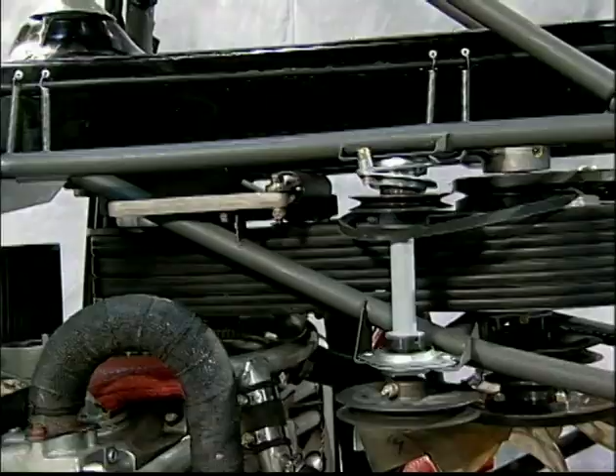You may find it necessary to reposition or remove the fan countershaft assembly to help in removing the pulley assembly. Loosen the main drive belts. Remove the bolt that secures the clutch tube weldment to the clutch arm casting.

Remove the two 5/16" bolts that secure the rod ends to the idler pulley arm. Caution: during the construction of the helicopter and final installation of these bolts, the builder was instructed to use Loctite thread locker on the bolts. It is likely the rod ends have also become locked to the bolt grip area.

When backing the bolts out, be sure the rod ends are not pulling away from the pulley assembly with the bolt. If the rod ends pull away from the pulley as you are backing out the bolts, damage from stress bending of the weldment will occur. Remove the clutch tube weldment.

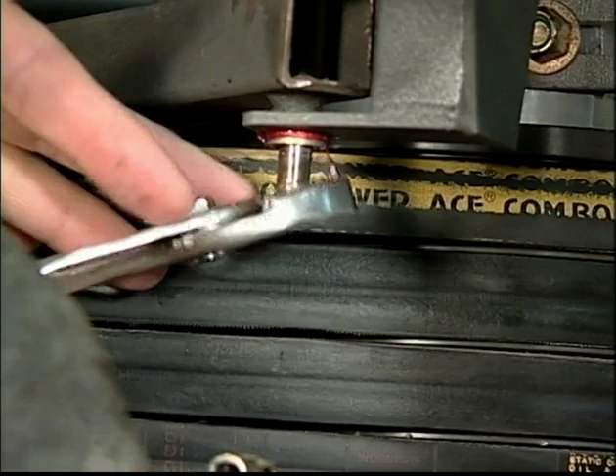Remove the pulley mounting arm bolt, part number E00-2522. Remove the assembly from the helicopter. Check the end play of the rod ends of the clutch tube weldment and the bolts in the idler pulley assembly.

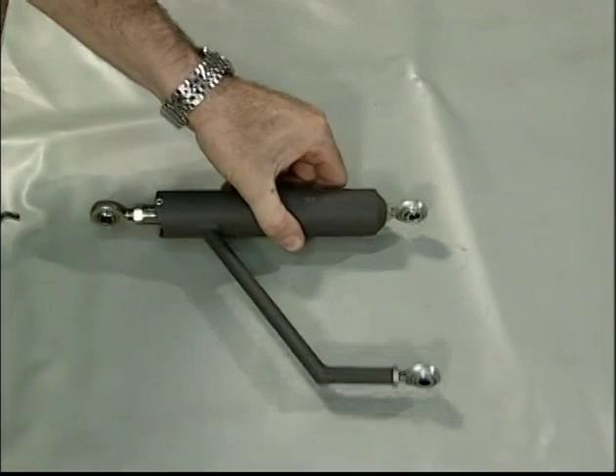The clutch tube weldment springs and piston need to be inspected and greased at the 100-hour service interval. Before removing the rivets, inspect for wear of the piston on the top and bottom by moving the rod end up and down. Look for excessive play. Replace the piston if necessary. Remove the pop rivets on the end of the clutch spring tube.

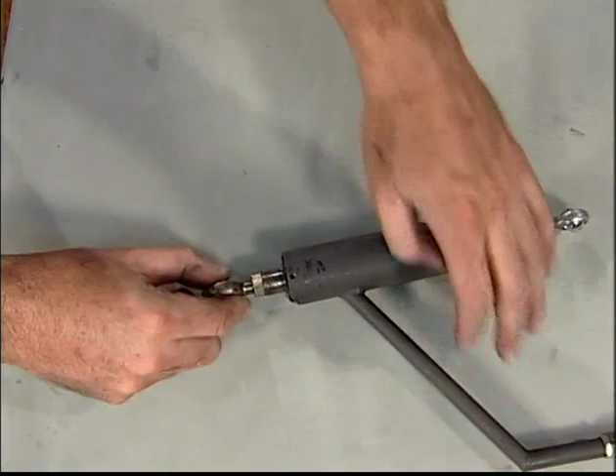Remove the tube piston and springs. Make a visual inspection for wear. Check the condition of the springs. Grease the springs, piston, and clutch spring tube. Install the two pop rivets while compressing the piston a slight amount.

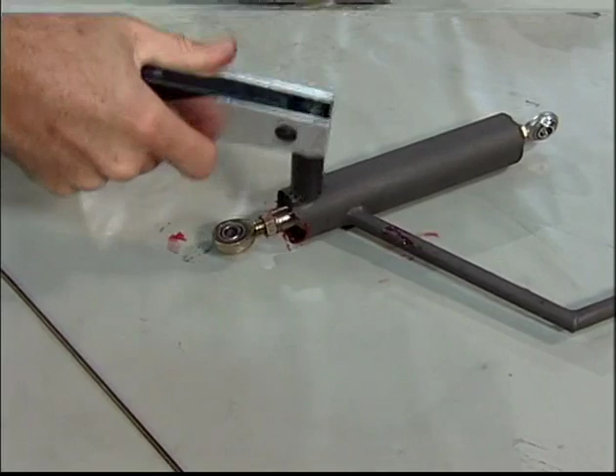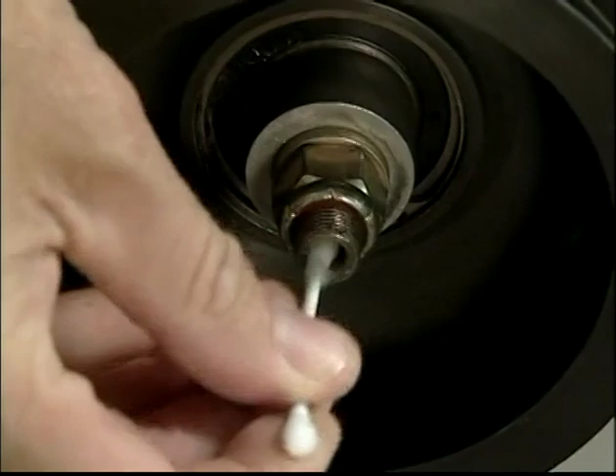Inspect and clean the idler pulley assembly. Clean the bolt hole of the idler pulley arm with a Q-tip and acetone. Clean the threaded bolt holes. Reinstall the assembly back into the helicopter. Place a thin film of grease on the bolt and mating surfaces.

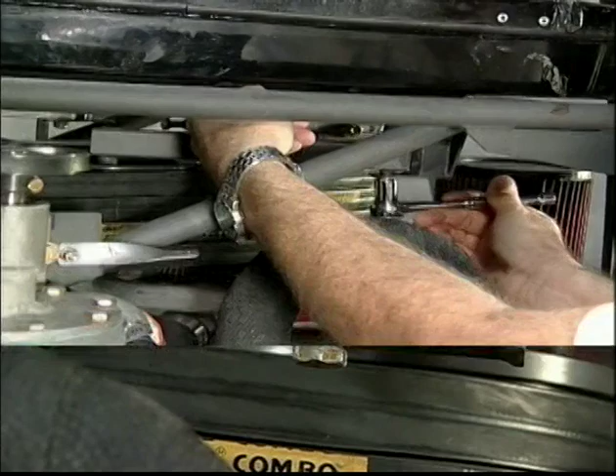Reinstall the bolt and replace the 5/16" nut. Tighten the nut enough to allow the pulley arm weldment to pivot. Reinstall the clutch tube weldment to the idler pulley arm. Use Loctite removable thread locker on the bolts. Install the piston rod end to the casting and check the idler pulley engagement.

Retension the main drive belts and check the operation of the idler pulley as shown earlier in the maintenance video series. Check the security and condition of the torque link and its components. If necessary, remove the torque link from the helicopter for a closer inspection.

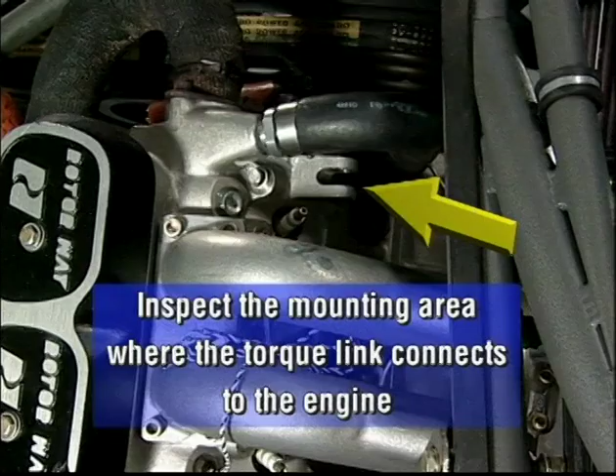The RI-162F engine is equipped with Rotorway's FADEC electronic fuel injection system. In this system, gasoline is delivered to the injectors at a very high pressure, up to 60 psi. Braided stainless steel hoses and high-quality fittings are used throughout the system. Check routing and security of all hoses. Inspect all hoses and fittings for leaks. Run your finger under each connection to verify that fuel is not leaking out.

Caution, Teflon-lined steel braided hoses have a tendency to set after being exposed to heat and pressure. Attempting to change the curvature of a hose after it has set may cause the lining to crack. After performing any maintenance that requires hoses or fittings to be uncoupled, perform a pressurized leak check. To do this, tighten all fittings, turn on the fuel pumps, and check carefully for leaks.

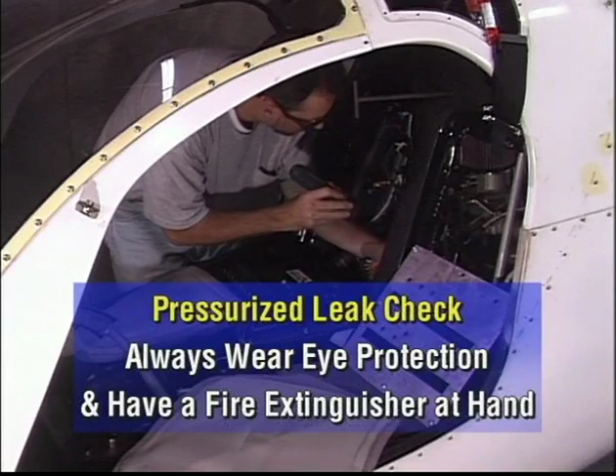Caution, the fuel system operates at a very high pressure. When performing this check, wear eye protection and have a fire extinguisher at hand. Check the system regularly in the first few hours of operation after any repair. Refer to the engine manual for further details.

Remember, every 25 hours of operation, check the pre-filter for any particles or debris that may have washed out of the fuel tanks. However, if there is a large amount of debris trapped in the filter, this would be an indication that more frequent service is required. Replace and reseat the inner O-ring every time the assembly is opened for inspection. Use petroleum jelly to reassemble a shutoff valve filter. At the 500-hour service interval, you will be shown the disassembly and cleaning of the entire fuel shutoff valve filter assembly.

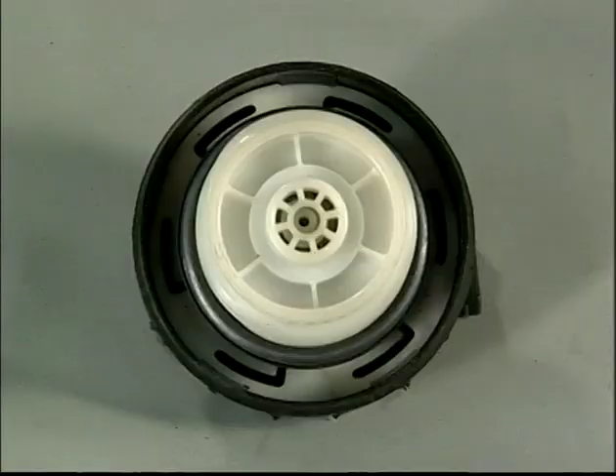The fuel tank caps are vented. If the vent becomes stuck or plugged, the engine may be starved for fuel and the fuel tanks may partially collapse. Remove the cap and inspect the plastic valve on the underside of the cap. To restore venting, heat a piece of welding rod or wire and push it through the valve.

The fan drive system is a series of pulleys and belts providing the proper speed reduction for the fan design. Since the fan drive countershaft was removed for idler pulley service, check the condition of the bearings of the fan countershaft drive assembly. Reinstall the assembly back on the frame.

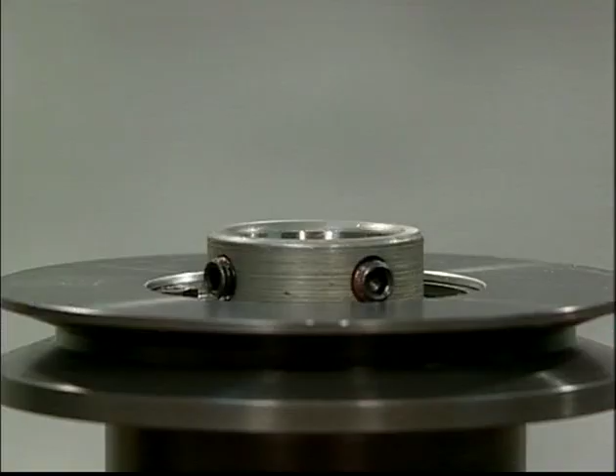Rotorway International has two designs of the hub fan pulley. One style fits between two snap rings, and Loctite 609 is used to secure the bearing to the shaft. The latest design uses a hub with two set screws. Loctite 609 is also used to secure the bearing to the shaft.

Verify and inspect the fan's hub bearing is secured to the lower secondary shaft. With the tail rotor belts loose and the fan countershaft belt loose, check for any side play. If you find the bearing is loose on the shaft, chances are your secondary shaft has been damaged and will need to be replaced. Any repairs made to the secondary must be made at Rotorway's Service Center. Do not attempt to disassemble the secondary. Call Rotorway's customer service for more information.

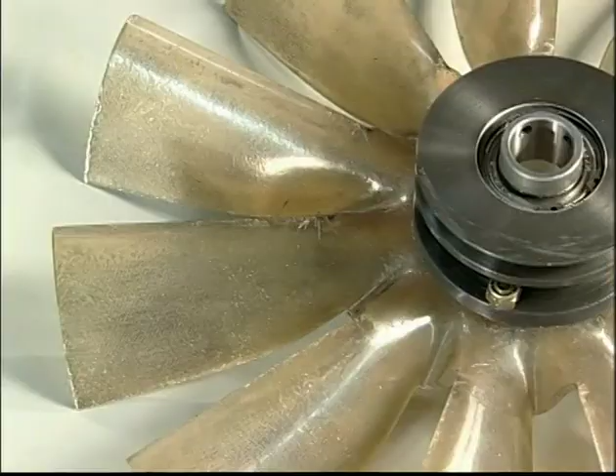Check the high temp fan for stress cracks on blades. Do not confuse stress cracks with excessive resin cracks. Stress cracks will penetrate the fiberglass, and resin cracks will be on the surface only. Check the condition of the fan drive belts and retension them. Note, these belts need to be fairly tight to prevent slipping.

The electrical system of the Exec 162F requires little maintenance if inspected properly. The three most common problems are corrosion, vibration of connectors, and chafing of wires. Replace the battery every 2 years or when it will not take or hold a charge. Check the acid level periodically to ensure battery plates are covered. Keep terminal posts clean and free from corrosion and dirt. To prevent corrosion, use dielectric grease or corrosion spray inhibitors on the terminals and connectors.

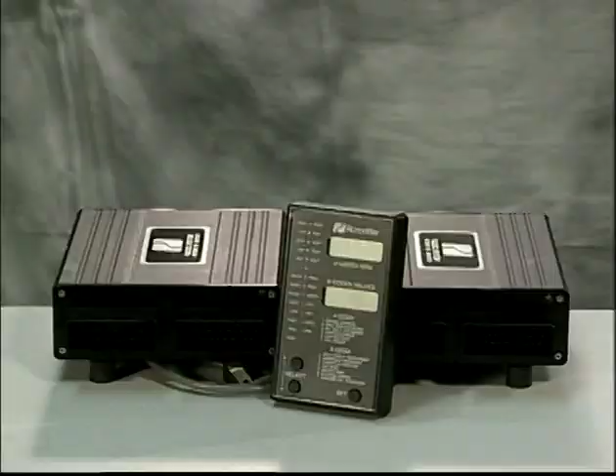The digital display monitor and engine control unit are not user serviceable. Refer to the engine manual for information on these parts. If these components malfunction, contact Rotorway customer service. Rotorway has 2 generations of FADEC control systems for the Exec 162F helicopter. Be familiar with your system by referring to the engine manual that came with your helicopter kit. On earlier FADEC systems, an assembly of relays and fuses was installed on the back of the pilot's seat inspection panel. Inspect all of the fuse holders for corrosion.

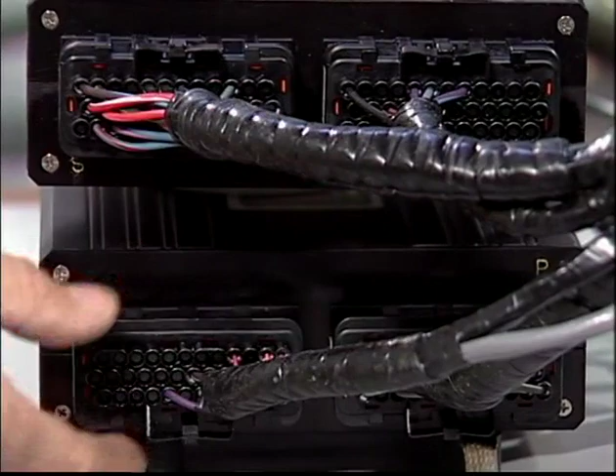Inspect the security of the plugs, wires, and connections. Do not attempt to unplug or disconnect the relay assemblies. If you suspect a problem with any of the relays, call Rotorway customer service for more information. Inspect the FADEC wiring harness for security and corrosion.

The fuse holders on the overhead switch panel and throughout the wiring harness can develop corrosion, resulting in poor connections. Remove each and every fuse from the holder and make a visual inspection. If corrosion is found, clean or replace the fuse holder and fuse.

Check the toggle switch by first disconnecting the power leads from the battery terminals. The switch should have a good solid snap action in both directions. If in doubt, check the switch with an ohm meter. Check the heavy gauge battery cable eyelets on both ends for corrosion and clean as necessary. Poor contact will cause excessive heat buildup and could result in hard starting. Note, the terminal on this battery shows evidence of heat buildup from a poor connection. Verify the lugs in the battery are tight.

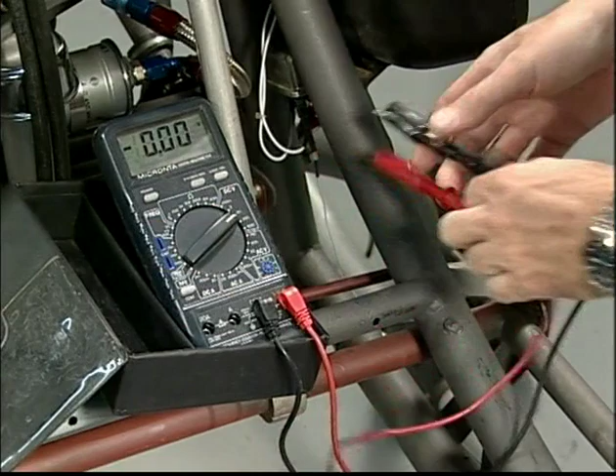Check the quick disconnect connectors on the starter relay for corrosion and poor connections. Check relay by unplugging the quick disconnect terminal that goes to the starter solenoid and activate the starter button. The relay should have a small clicking action. Be sure the battery is connected and the key switch is on. If the relay chatters, check the voltage going to the relay. Voltage should be a strong 12 volts from the battery.

Check to see if the relay is properly grounded. If a problem still exists, replace the starter relay. Check the condition and security of all the FADEC connectors. Check that all wires are secured away from moving parts and that no wires are chafing against other components. Plugs, pins, wires, and other components may be replaced individually if necessary. However, do not attempt to repair or change any of the FADEC connectors as special tools are required. Contact Rotorway customer service for further information.

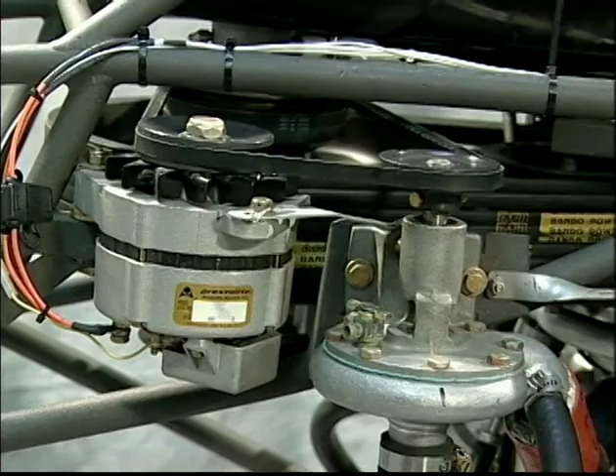To check the voltage regulator for normal operation, monitor the voltage meter or select the battery voltage on the digital display during the run-up. If the regulator is working, a voltage jump will be noticed on the meter and the digital display during the run-up procedure. If the meter does not show a positive voltage charge, check the following. Alternator switch is on, voltmeter is working. Check the tension of the water pump alternator belt. Check the grounding of the alternator to the frame.

Make sure there is good electrical contact between the mounting bracket and the alternator. Check the fuses located in line of the wiring harness near the alternator. There are 2 fuses located on the output side or field side of the alternator. If all of the procedures above are determined to be in normal operating condition, replace the voltage regulator.

If a problem still continues, it is possible the alternator is defective. Check the alternator output with the helicopter in full operating condition and with the alternator switch on. The output should be 13.5 to 15.0 volts with a 16-volt maximum. If proper output cannot be achieved, the alternator will need to be removed for repair or replacement.

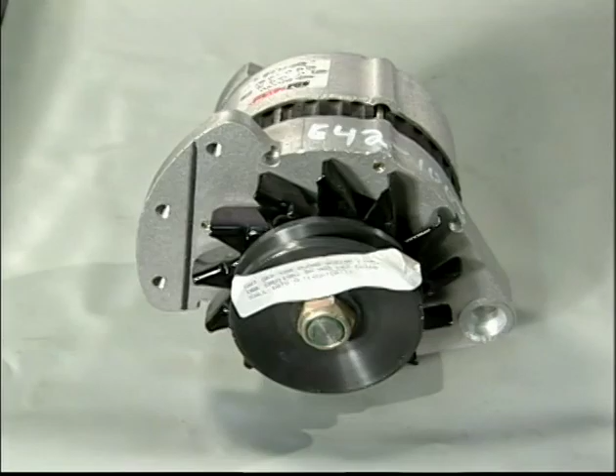Note, this alternator is reworked at the factory to achieve Rotorway International specifications and requirements. Replace only with an alternator from Rotorway's parts department.

Instrumentation on the Exec 162F is normally maintenance-free. It is, however, extremely important to keep it in perfect operating condition. The instrumentation provides the pilot continuous information on all the helicopter systems. All items are on condition recommended change-out.

The ground handling wheels for the Exec 162F were designed for the sole purpose of ground handling the helicopter when the rotors are not turning. This system allows you to handle the helicopter on asphalt, concrete, and grass. Inspect the ground handling assembly for cracks, especially around the weld areas.

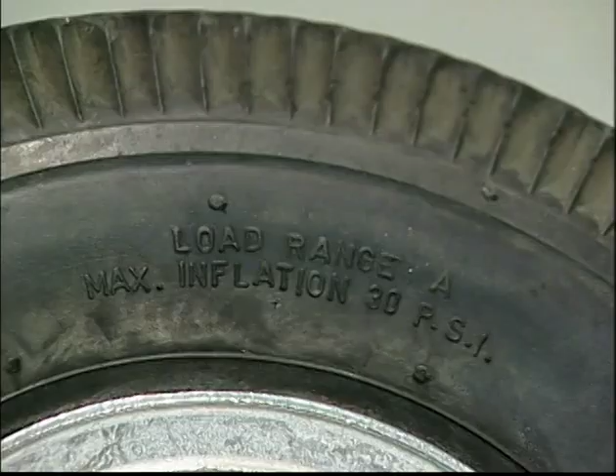Refer to the tire sidewall for proper inflation information. Do not leave the ground handling wheels in direct sunlight. The air inside the tires will expand and blow out the tire. If handling over rough ground, reduce tire pressure to help absorb the shock being transmitted to the rotor system.

Tire track is important for maintaining longevity of the rear landing gear. If the tires track outward, this will put abnormal stress on the landing gear, which can result in landing gear failure. Check tracking every 500 hours. At no time ground handle the helicopter fully grossed out or with anyone in the cabin. Never ground handle with the ballast weight in the solo position.

The ballast weight and ballast weight transport system was designed to keep the helicopter within its operating limitations during solo and dual flight configurations. For proper location of the ballast weight, refer to the flight manual. All weldments should be inspected thoroughly. Caution: if a weldment fails and causes the ballast weight to depart from the ship during flight, the weight and balance of the helicopter could move outside the operating limitations.

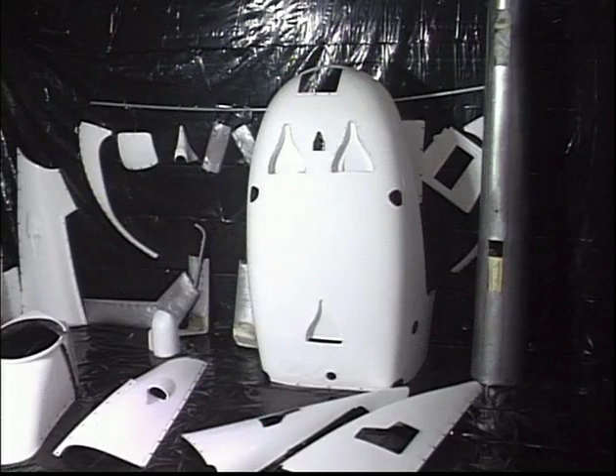The choice of paint is left up to the owner-builder of the helicopter. Any maintenance required should follow the paint manufacturer's recommendations. The body panels on the helicopter are manufactured with a gel coat finish. We recommend the use of a two-part paint that will give you years of trouble-free and very low maintenance.

Note, the lighter the color of the paint used, the less heat will be absorbed into the cabin and engine compartment, resulting in a cooler operating condition. The shades we find best are light colors such as white, light blue, and tan.

The Exec 162F can be operated with the doors either on or off, depending upon the weather and pilot's discretion. Check bolts part number E00-2300, E00-2302, and E00-2304 for tightness. Caution: if the doors were to come off in flight, serious damage could occur to the helicopter.

The main rotor blades are one of the key components of the helicopter. Proper maintenance and care of the main rotor blades will increase their longevity. The main rotor blades are made from aluminum alloys and are constructed from three pieces: the main spar, C-section, and an upper and lower aluminum skin.

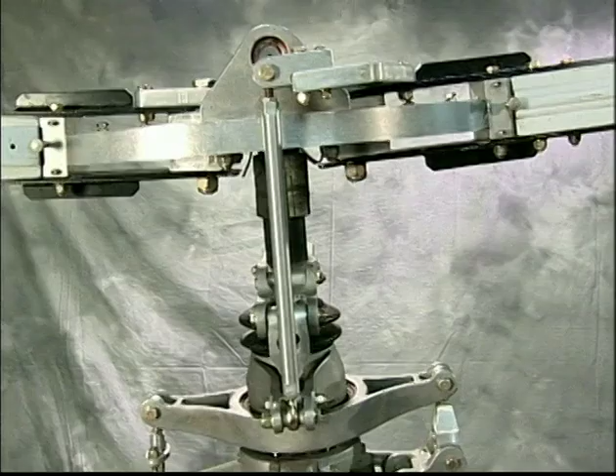Before removing the rotor blades, mark the pitch links with a marker pen. This will ensure they will be installed exactly the way they were removed. Mark the pitch links indicating which blade, master or slave, they attach to, and also the up position.

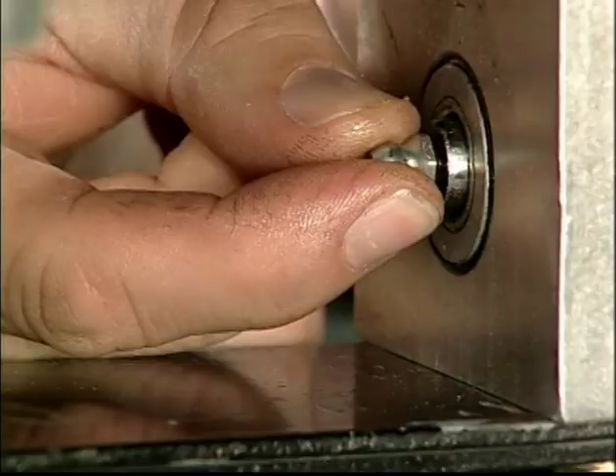This tool will enable you to grease the bearings with the blades removed and the liner blocks in place on the blade straps. By leaving the liner blocks in place, it is not necessary to perform the lead lag adjustments when you reinstall the main rotor blades. Insert the tool into the bearing. Pump the grease until the grease visibly comes out of the bearing, purging out the old grease.

Rotate the inner race of the bearing to spread the new grease. Then wipe away the excess grease. Important, check and verify the bearing turns freely. If it does not, the bearing must be replaced.

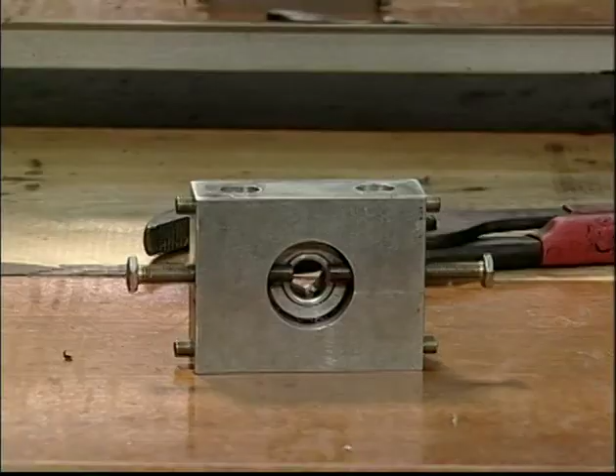Loosen the adjustment bolts, part number E00-2417, 2 to 3 turns counterclockwise, and remove the aligner block assembly. The reason you do not back out the bolt all the way is because the bolt end threads may be compressed or have a burr that could damage the aluminum block threads.

Slowly back out the bolts until you feel a slight resistance, then place the block in an oven and heat to 225 to 250 degrees Fahrenheit. Caution, do not exceed 300 degrees Fahrenheit. Check the oven temperature with a calibrated thermometer. Place on a press and using a socket of the appropriate size, press out the bearing with light pressure.

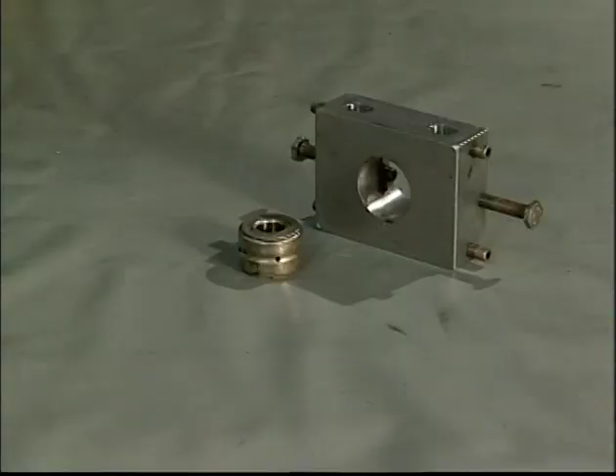Clean the bearing hole in the aligner block with acetone. Clean the new bearing with acetone and prepare to reinstall the bearing into the aligner block. Before installing the new bearing, check the condition of the all-thread bolts. If you determine either of these bolts require replacement before the RCO time of the aligner block assembly, follow these procedures.

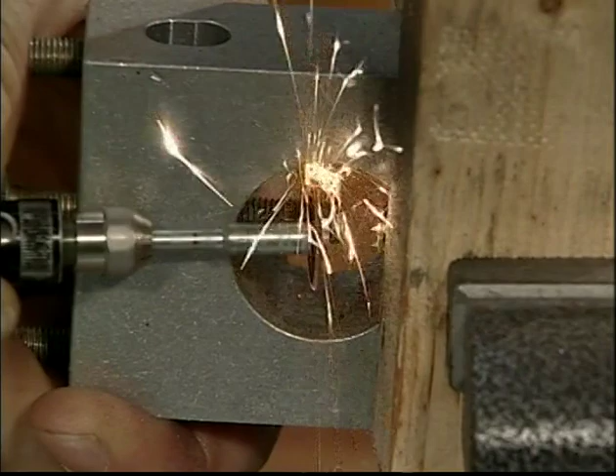Clamp the aligner block in a vise using wood shims to prevent damage to the block. Use a small die grinder or a high-speed sanding disc to grind the tip of the all-thread bolt completely off, about 1/4 inch from the tip. Dressing up the threads with a good file or sandpaper, back the all-thread bolt completely out of the aligner block.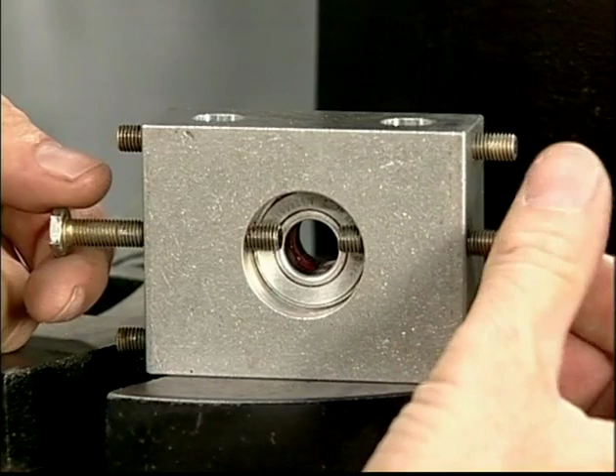Heat the block with an oven and press the bearing into the block with light pressure, leaving the bearing protruding 50 thousandths from the face of the block. Use a piece of 50 thousandths aluminum with a hole cut oversized for the bearing as a thickness gauge. Check the all-thread bolt for clearance of the bearing. Let the block assembly air cool, never quench with water. Pump a small amount of grease using the tool shown earlier into the new bearing and make sure the bearing turns freely.

Check the lead lag pin on the root end of the main rotor blades. If this pin is deformed and shows signs of the lead lag bolts being over-torqued, contact the factory for further information. Reinstall the aligner block on the blade according to the directions in the construction manual or construction video regarding rigging main rotor blades.

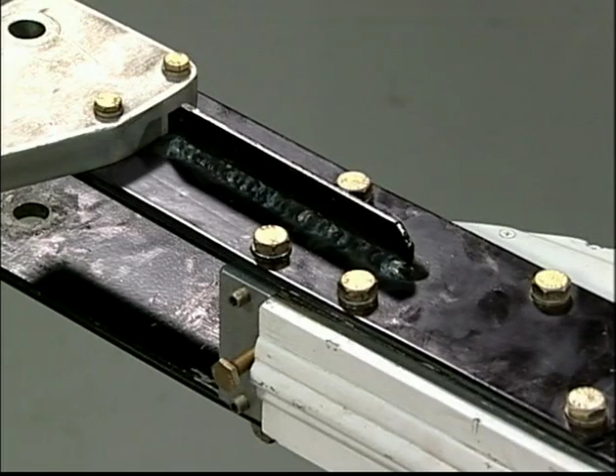Note, after the aligner block bolts, part number E00-2523, have been loosened and retorqued 3 times, they must be replaced. The torque requirement on these bolts is 20 to 22 foot-pounds. Check the torque of the blade strap bolts. They should be 12 to 14 foot-pounds. Do not reinstall the blades at this time.

The rotor hub system is comprised of 3 sub-assemblies: the rotor hub assembly, the swash plate, and main shaft. It comes from the factory as a completed assembly. To have a smooth running and normal component life, the rotor system will depend directly on how well the builder sets up and maintains the system. At every 100 hours, a thorough inspection of the rotor system is required.

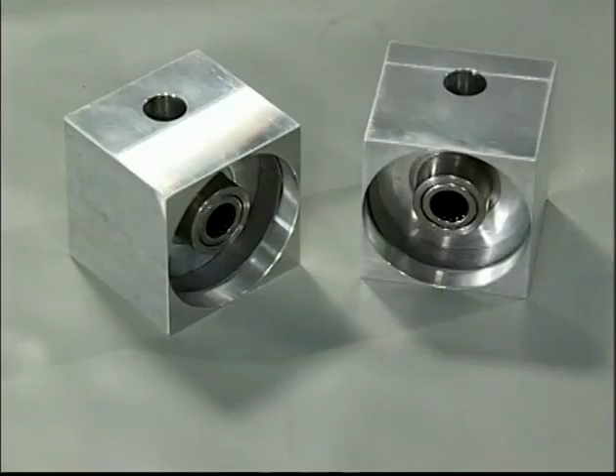We will begin with the thrust blocks. The thrust block alignment bearing is a 100-hour changeout. These new bearings are included in the 100-hour service kit. Remove the elastomeric bearing, thrust block liner, and the dust cap. Use a marker on elastomeric bearings to note M for master and S for slave to make sure the same bearing goes into the corresponding thrust block.

Inspect the elastomeric bearing, part number E20-1400 and 1401, for signs of delamination or separation. The elastomeric bearings in the rotor hub are comprised of thin layers of rubber and metal sandwiched together. It is normal for some rubber residue to be present on the edge of the elastomeric bearing. However, if you notice delamination of the bearing or you question the condition of the bearing, contact Rotorway customer service.

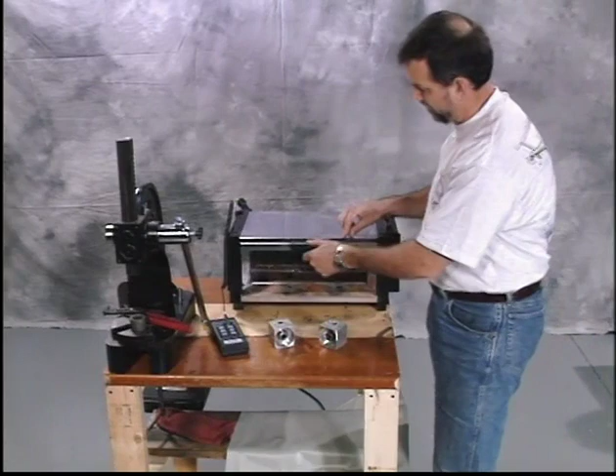These bearings must be inspected every 100 hours and replaced at 1,000 hours or on condition. Many factors determine how long they will last, such as age, number of hours used, climate, etc. The elastomeric bearing must be kept dry and free from grease, oil, and solvents. Replacement of thrust block alignment bearings is as follows. Heat the block to 250 degrees and press the old bearing out of the thrust block with a press. Note, this is a very tight fit.

Very important, use care not to move the steel insert. Use a steel bushing as shown to support the shoulder of the steel insert. If the steel insert moves, it may affect the alignment of the 9/16" bolt hole, thus making it difficult, if not impossible, to install the bolt.

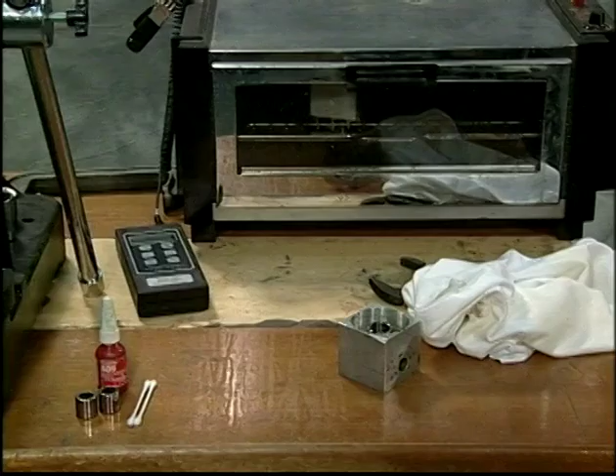Clean the area where the bearing makes contact with the thrust block and reheat the block to 250 degrees. Lightly coat the new bearing with Loctite 609. After the block has been heated to 250 degrees, remove the block and lightly coat the inside wall of the steel insert.

Support the steel insert with a socket that is slightly smaller than the outside diameter of the steel insert as shown. Press the new bearing, part number E49-1340, into the thrust block until it is even with the thrust block steel insert. Make sure the numbers on the end of the bearing are facing out.

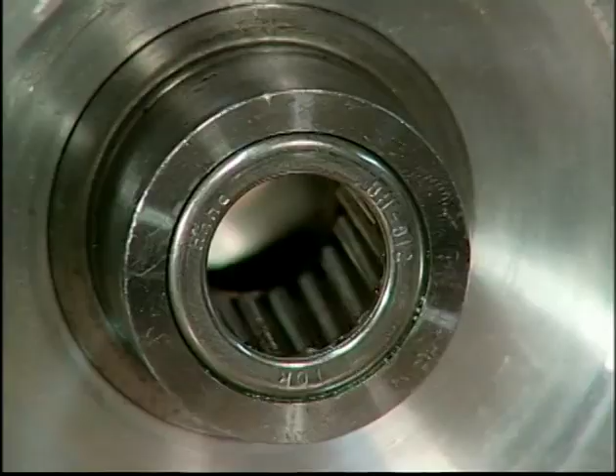Let air cool and replace the dust cap, liner, and elastomeric bearings. Caution, make sure all parts are reassembled in their original orientation.

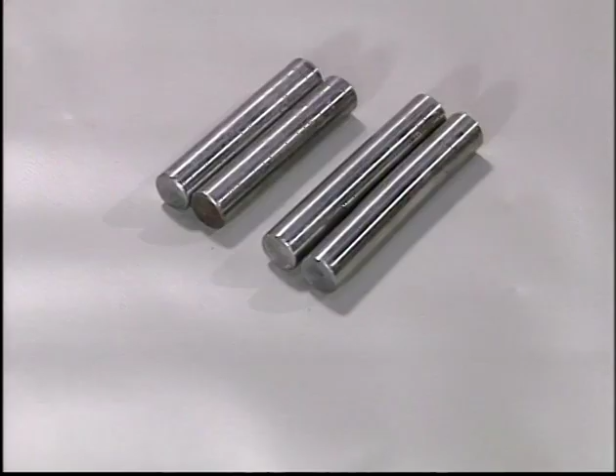The outboard and inboard pitch pins are 100-hour change-out items. These parts are included in a 100-hour service parts kit. Removal of inboard and outboard pitch pins are as follows. Remove these bolts, part number E00-2422 and part number E00-2424. Note the inboard pitch pin lock bolt is slightly longer than the outboard bolt.

Grasp outboard pitch pin with a pair of pliers and a soft cloth to prevent damaging the outer surface of the pin. Pull directly outward, removing the pin from the hub. Tip the hub so it is at a 30-degree angle to the main shaft. As you tip the hub, position the rubber shaft protector to prevent the pitch pins or hub from contacting the shaft.

Install a piece of plastic tubing over the 1/4-inch shaft of the long punch as shown. This will help prevent scoring or nicking in the inside of the pitch pin holes. Now lightly tap the inboard pitch pin out. Use caution and try to avoid tapping the thrust washer out at the same time.

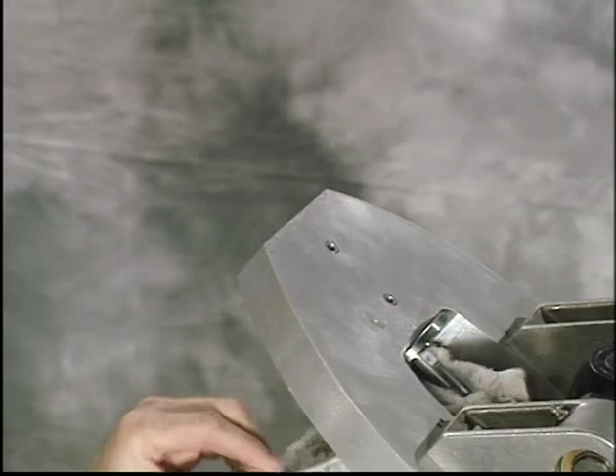If the washer does come out, clean all mating surfaces with acetone and coat with Loctite 609 and put the thrust washer back in place. It may be necessary to tap with a mallet to ensure seating. Before installing the new pins, ensure the holes in the hub are clean and free from dirt and grit.

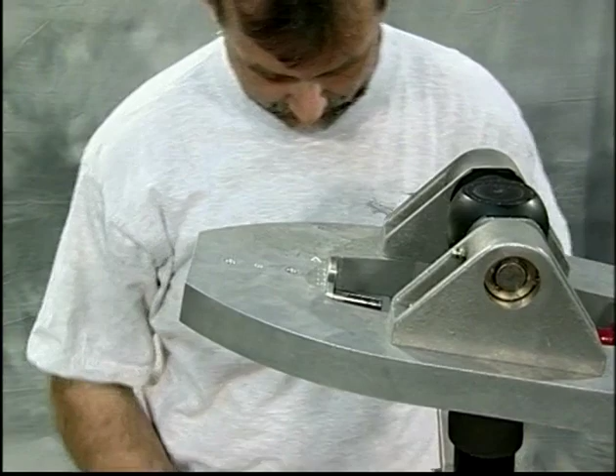Lightly lubricate the pitch pins with anti-seize and insert the inboard pitch pin into the inboard hub hole. Keeping the flat of the pin upward, tap the pin with a plastic mallet to seat the pin in the hole. Then use a large C-clamp with pieces of plastic to protect the hub surface to press the pin in the hole. The pin should be inserted to 785 thousandths of an inch, plus or minus 5 thousandths. Use the old bearing from the thrust block as a guide.

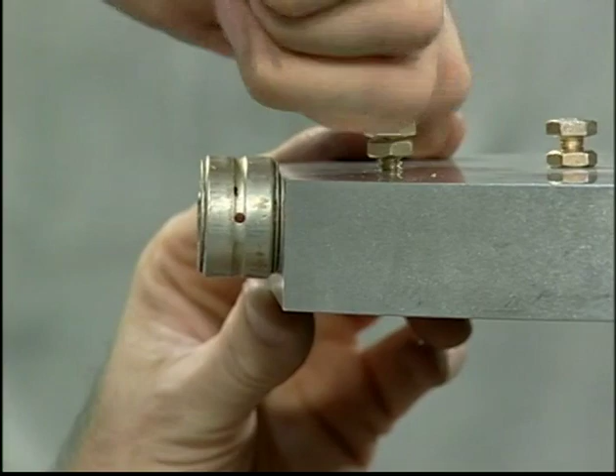Reinstall the bolt, part number E00-2424, and tighten slowly to make sure the pitch pin's flat spot is perpendicular to the bolt. Tighten the jam nut securely. Reinsert the outboard pin, but hold a tolerance of 750 thousandths, plus or minus 5 thousandths of an inch, from the outboard edge of the hub. Use an old aligner block bearing as a guide. Tighten the bolt slowly, part number E00-2422, and lock the jam nut.

Recheck the measurements. Inboard pitch pin 785 thousandths plus or minus 5 thousandths. Outboard pitch pin 750 thousandths plus or minus 5 thousandths. Although the hub plate appears to be a very substantial and solid part, it can be damaged. Caution should be taken to prevent gouges, nicks, and deep scratches to the hub plate.

The Delrin shims and stainless steel shims are on-condition items and must be inspected every 100 hours. You will also need to check the hub alignment every 100 hours. The tolerance for hub alignment is 1/1000th of an inch total indicator reading. This check will be demonstrated later in this tape.

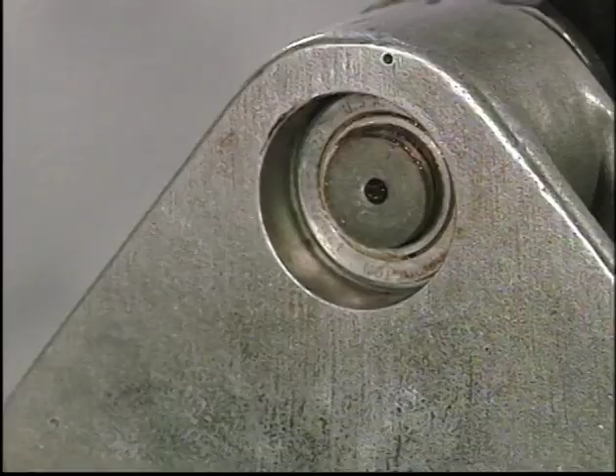If the alignment falls within the prescribed limits and the shims are in good condition, it is not necessary to replace the shims. The shims can be inspected while performing service on the main rotor drive pin. The main rotor drive pin must be removed and inspected carefully for grooves caused by contact with the stainless steel shims every 100-hour inspection. The Exec 162F rotor system will require hub shimming at different intervals depending on how smoothly you keep the rotor system adjusted.

The 100-hour service kit includes a rotor hub shim kit. The stainless steel shims come in a variety of thicknesses, each with its own part number. This kit contains 10 stainless steel shims plus 4 Delrin shims. This will give you a variety of sizes so that the exact combination of shims can be chosen.

Turn the hub so that the serial number stamped on the hub plate is on the pilot side and the hub is aligned fore and aft to the helicopter. It makes no difference which side of the helicopter the numbers are on, but it's a good practice to establish a normal and routine procedure. Next, index the teeter blocks to the hub and the hub to the shaft.

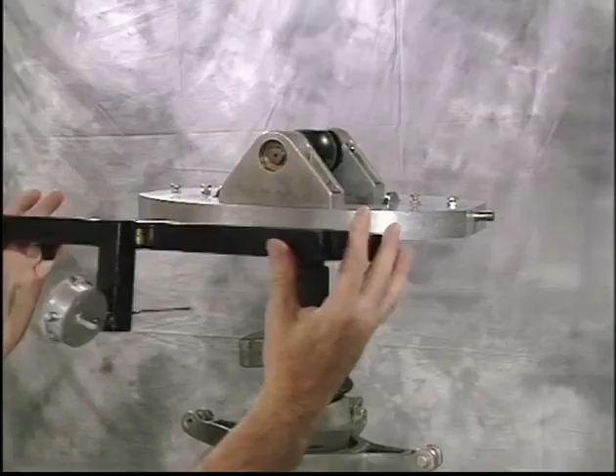Place the fixture on the hub. Push the fixture up against the outboard pitch pins and hold the fixture down on the 3 rivet point contacts located on the bottom. Securely hold the fixture on the hub and rock the hub slightly back and forth until the needle on the indicator stops moving in a central position. Then zero the indicator.

Carefully remove the fixture and place it on the other side of the hub using the same procedures. Repeat the steps and determine how far the hub is off-center, if any, and which direction it needs to move. Record your measurements. Place the C-clamp across the teeter block so that the clamp jaws clamp at the base and close to the center of the block. Using the 9/16" socket wrench and open-end wrench, remove the locking nut from the bolt.

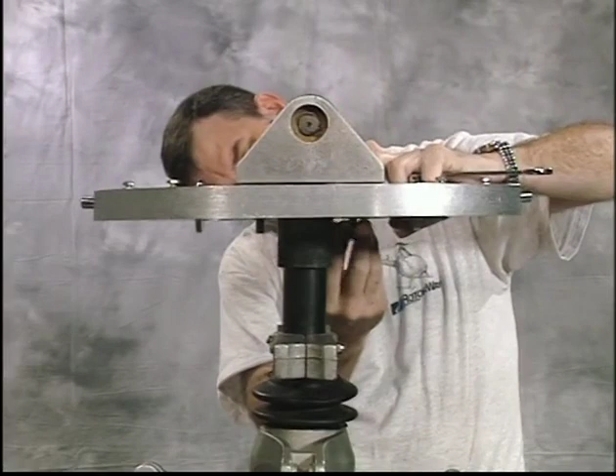After the teeter block bolts have been removed, you can now remove the other teeter block bolts and set the hub plate on the counterbalance just below the shaft knuckle. Next, remove the 2 snap rings and the large thin washer from the main drive pin. Deburr the edge of the snap ring grooves and edge of the pin with a 400 to 600 wet and dry sandpaper.

With hand pressure and a light tap from a plastic mallet, remove the teeter blocks from the main drive pin. Fabricate a storage unit to keep the orientation of the parts to the hub plate. It is especially important to keep shims in their exact order and orientation. Do not mix the order or orientation of the shims. Inspect the teeter block for any cracks and galling the shims may have caused.

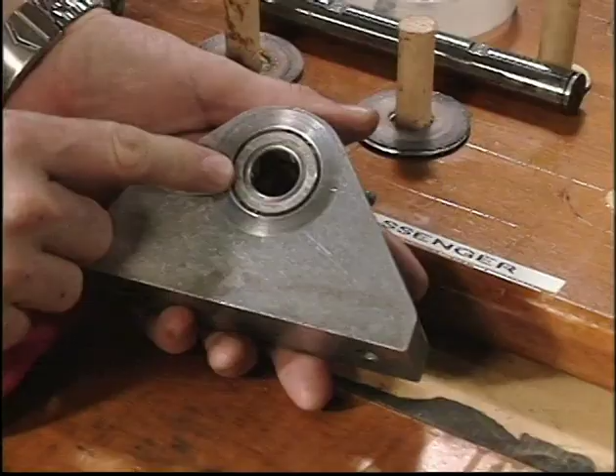Inspect the bearings in the teeter blocks. The recommended changeout on the teeter block bearing is 500 hours. However, if any damage or wear is apparent, they must be changed on condition. Repeat process for the other teeter block. Remove the hub plate, inspect the condition, and clean. Remove the 4 set screws located on the main shaft knuckle. Note there are 2 set screws in each hole.

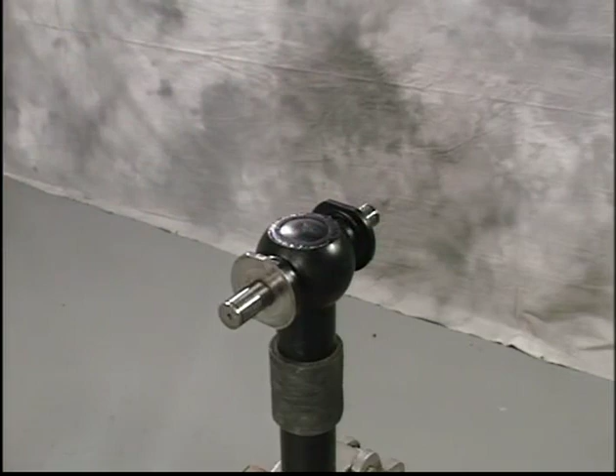Tap the main drive pin out. Remove the drive pin from the shaft knuckle for inspection. Inspect the main drive pin. If any grooves or scratches are present, the pin must be replaced with a new one. Otherwise, it may be used for up to 250 hours, which is the RCO. This main drive pin has been removed at 100 hours. It has marks from the bearings. However, there are no grooves from the stainless steel shims. This main drive pin is okayed for continued use.

If you need to replace the shims, find a smooth spot on these parts and measure all shims together with a micrometer and record the measurement.

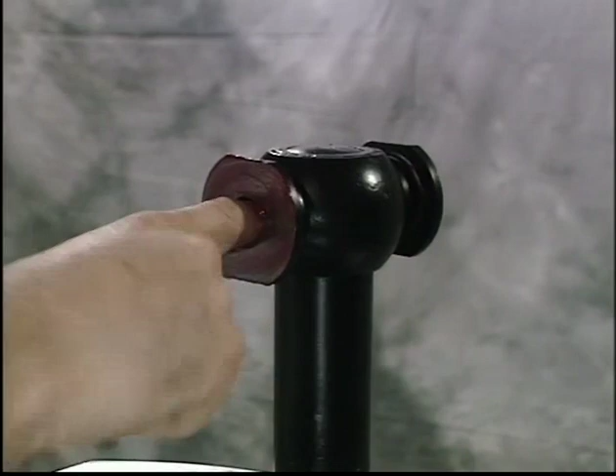Place the hub plate back on the shaft in the correct position according to your earlier marks. Place a thin coat of grease on the outer surface of the shaft knuckle and the drive pin hole. Install the drive pin with the flats facing up.

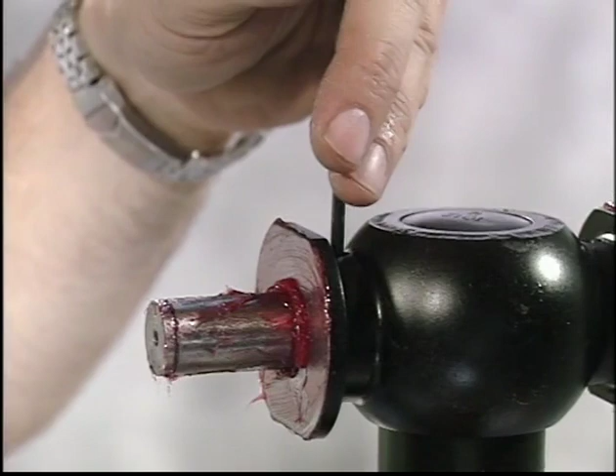Install only one set screw at this time and slowly tighten to verify the flats are facing up. Then back off slightly. This will prevent the pin from rotating when installing the other parts. Place the steel and Delrin shims on the main drive pin. All shims should have a light coat of grease on each side.

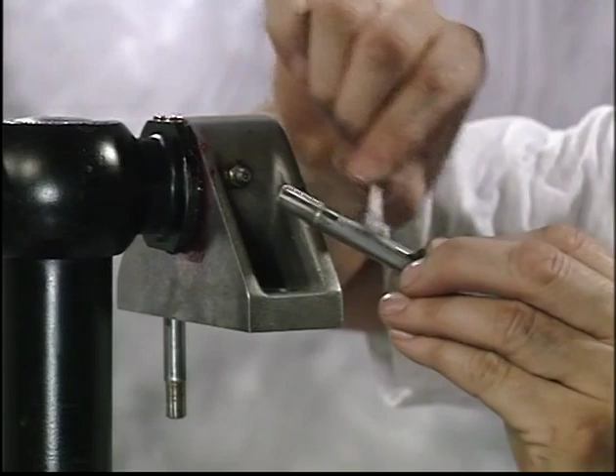Place one teeter block on the main drive pin with the bearings closest to the knuckle. Grease the bolt holes and bolts. Check your identification marks. Align the holes with the hub plate and insert the bolts through the teeter blocks and through the hub plate. Torque these two bolts to 24 foot-pounds.

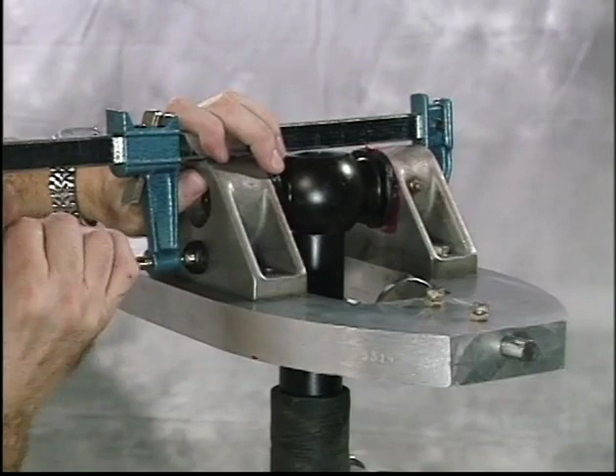Place the other teeter block on the main drive pin, following the same assembly procedures. Install the drive pin washers and snap rings with the sharp edge of the rings facing out. Replace the clamp on the teeter blocks and tighten slightly. Grease the bolt holes and bolts.

Install the bolts through the holes using the clamp to align the holes. Use a plastic hammer to drive the bolts through the holes. If the bolts drive hard, adjust the clamp pressure so that they go with ease. Do not thread the bolts into the hole, as the bolts will gall the aluminum. Torque these two bolts to 24 foot-pounds.

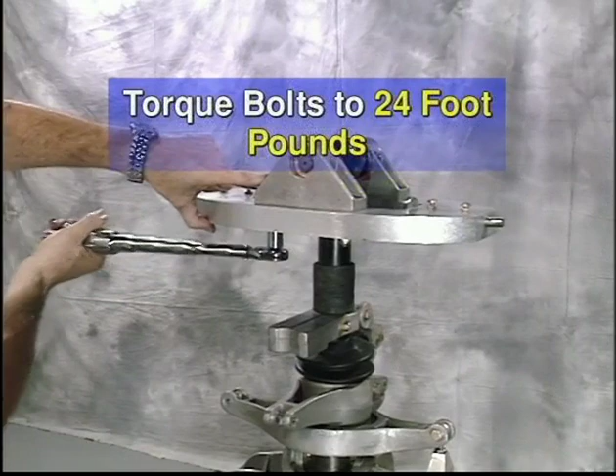Rock the hub back and forth 15 to 20 times to set the shims and grease in their respective positions. Remember, there are 2 set screws to each hole, with the longer one going in first.

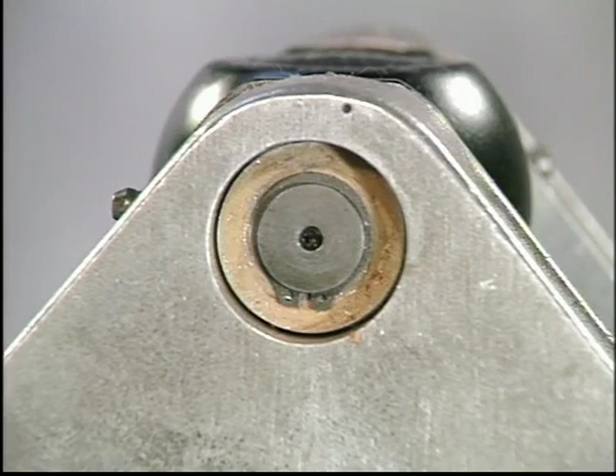After assembly, the 2 objectives must be reached. The hub must be on center of the main shaft. The hub pressure must be between 8 to 12 pounds. Note, at times this process is difficult to achieve on the first attempt. Record the poundage of pull required compared to your recorded information before disassembly. If all procedures were done correctly, you should not be any more than 2/1000ths of an inch to 4/1000ths of an inch off center, and hub pressure will still be within tolerance.

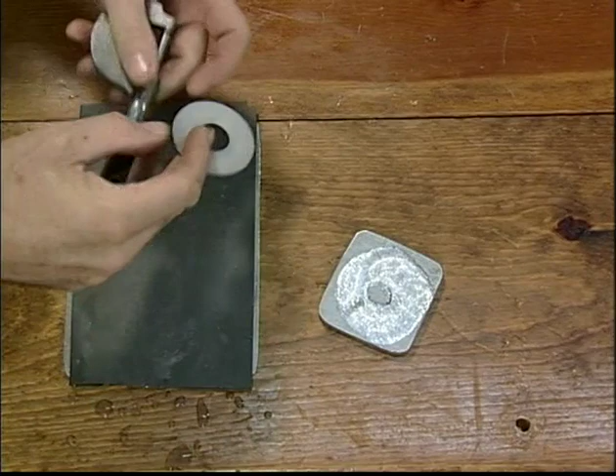Note, the bolts must be torqued to 24 foot-pounds to get accurate measurements. When the hub is correctly centered and hub pressure is within the limits specified, final assemble the hub. The teeter blocks, part number E49-5100, have grease fittings that require a couple shots of Mystik JT6 grease every 25 hours. Keep slowly pumping the gun until the grease flushes through the bearings.

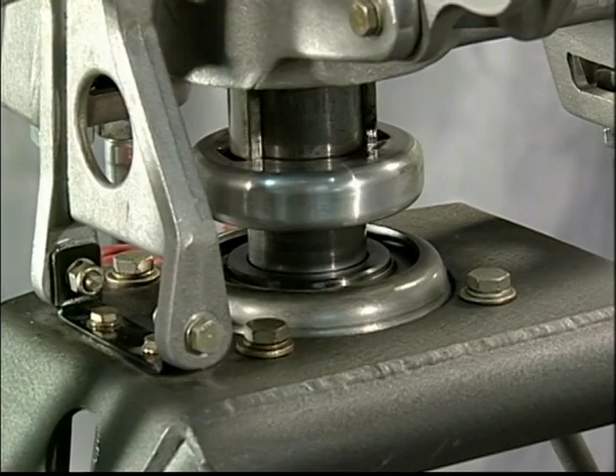The main shaft bearing, part number E49-1220, should be checked for end play at every 100-hour interval. Loosen the bolt on the slider ball ring clamp with 7/16" sockets. Raise the collective to the full up position. Use a flat blade screwdriver to wedge in between the split and the ring and raise the ring up as high as it will go. Mount a magnetic base indicator holder to the steel hood bracket or frame as shown here. Use hose clamps to secure the base to the frame.

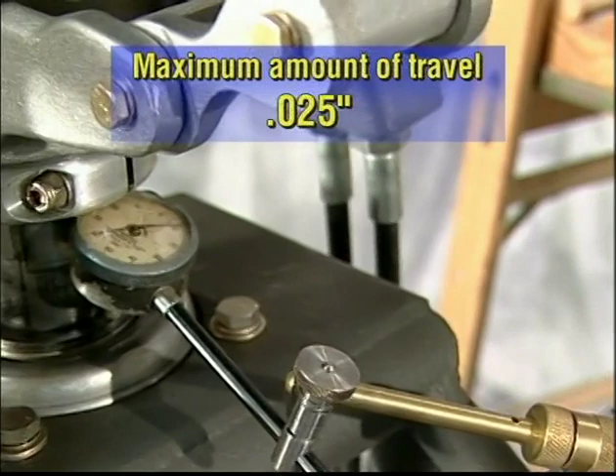Position the indicator so its contact point is on the inner steel race of the main bearing. Using a hoist as if performing a static hang check, lift the helicopter and read the dial indicator. The maximum amount of travel allowed is 25 thousandths of an inch. If your measurement is greater than 25 thousandths of an inch, you must replace the main thrust bearing.

Reposition the slider ball ring clamp. The slider ball ring clamp is positioned so the lower ears of the collective slider ball stop at 50 thousandths above the inner race of the main shaft bearing. This also serves as a downstop of the collective control. Use a piece of 50 thousandths of an inch aluminum stock to set the proper position of the ring clamp.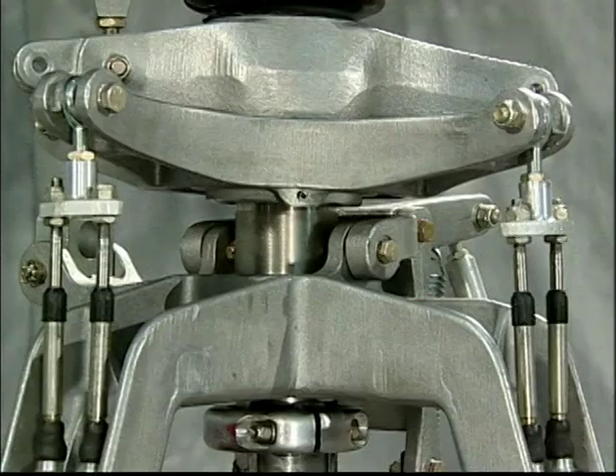The slider ball adjustment collar, part number E49-3230, is adjusted and set on a swash plate assembly at the factory. However, it may need to be readjusted occasionally if the helicopter is exposed to severe or radical temperature changes. Level the main shaft of the helicopter by shimming the skids.

Using a protractor level, set the swash plate perpendicular to the main shaft by placing the level as shown. Rotating the shaft may help you in achieving the fore and aft angles.

Loosen the two set screws, part number E00-9302, and turn the adjustment collar approximately 2 full turns in a counterclockwise direction, loosening the slider ball. With the adjustment collar in this position, cut the wire tie holding the bottom part of the boot to the swash plate.

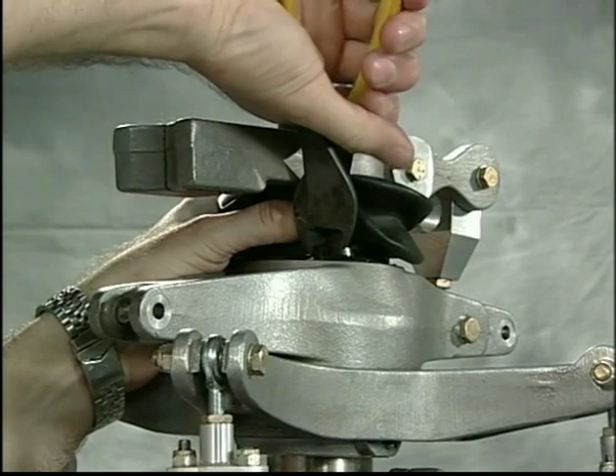Raise the boot and apply grease to the slider ball and main shaft. Move the collective up and down to work the grease in.

Use a product from CRC Industries called Sta-Lube Marine Grease. This grease is waterproof and has a high melting point. It also has superior rust and corrosion protection. Replace with a black wire tie.

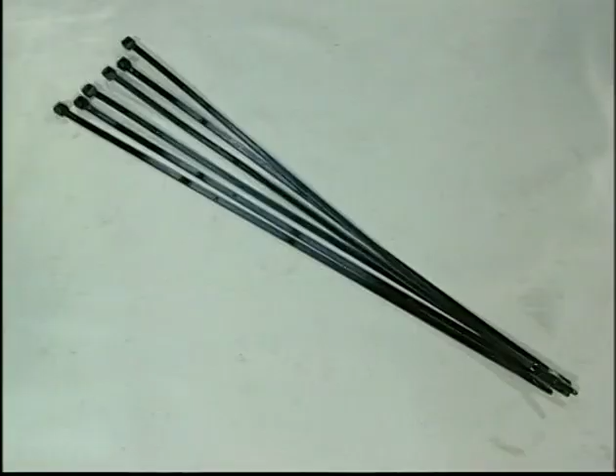Black weather-resistant ties are recommended for outdoor use. The addition of carbon black provides good ultraviolet protection and prolongs useful life. Now turn the slider ball adjustment collar clockwise until the knurled nut comes to a stop, using finger pressure only.

Make a reference mark on the adjustment collar and slider ball, and back off the adjustment collar counterclockwise 1/2 inch. Then tighten the two set screws. If incorrectly adjusted, the slider ball adjustment collar will produce a feedback through the cyclic control.

If the adjustment is too tight, the cyclic will want to follow the direction of rotation of the main rotors. If the adjustment is too loose, the pilot will notice cyclic inputs will be slow to respond and sluggish. If feedback in the form of cyclic rotation continues, you may back off the adjustment collar another 1/4 inch for a total of 3/4 inch maximum from starting index mark. If an undesirable condition still exists, contact Rotorway customer service.

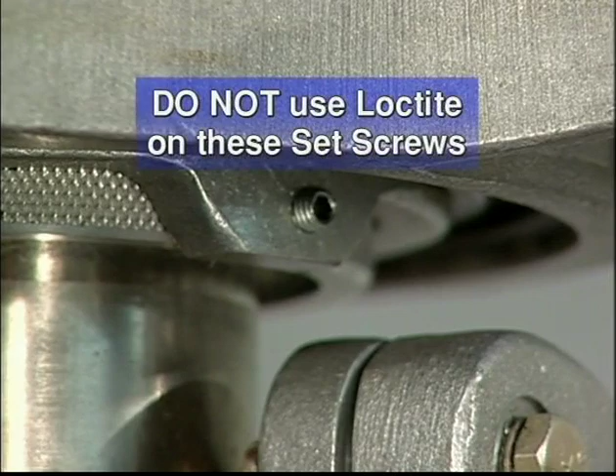The use of some silicone sealant on the set screws will help lock the set screw in position and prevent them from backing out. Do not use Loctite. Thoroughly inspect all the parts of the swash plate assembly for wear.

To determine if the swash plate scissors need new bushings, measure the lateral deflection of the rotating swash plate with relation to the scissor and counterbalance. Normal movement should be between 1/16 and 1/8 of an inch lateral deflection. If the deflection is greater than 1/8 of an inch, then disassembly and further inspection is required.

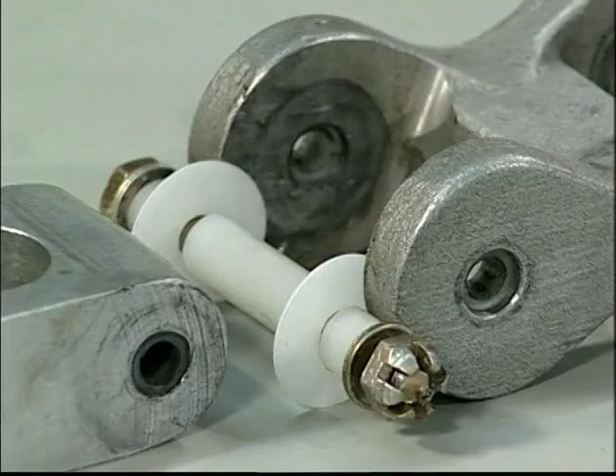The scissors use short nylon bushings. The counterbalance and scissors clevis use long nylon bushings. Between the contact surfaces of the swash plate scissors and the counterbalance and scissors clevis are Delrin washers. Inspect the bushings, washers, and bolts for wear and replace if necessary.

After replacing any nylon bushings, check the fit of the bolt. It may be necessary to use a reamer in the nylon bushings to achieve the proper fit of the bolt. The bolt should not bind in the bushings. You should be able to turn the bolt with your fingers.

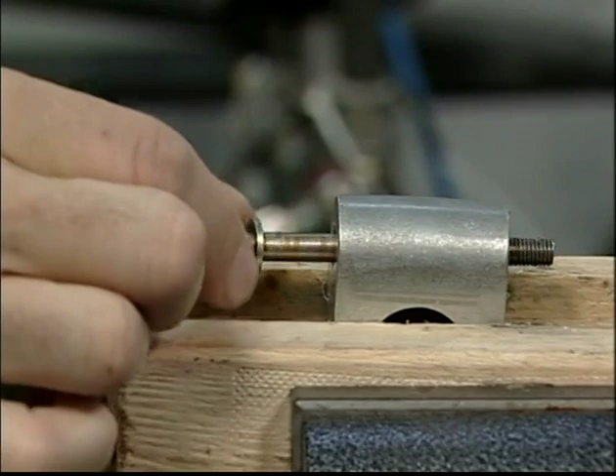Use a film of grease on the bolt and both sides of the Delrin washers upon final installation. When replacing the Delrin washers, it may be necessary to sand them slightly with 400 grit sandpaper to achieve the proper fit.

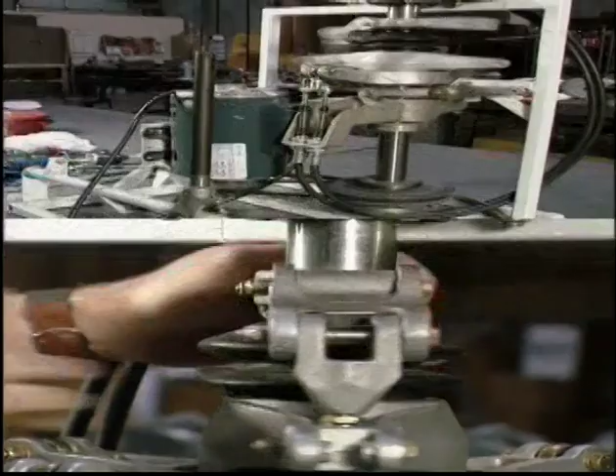Follow this rule as a guide when tightening the castellated nuts. The maximum the castellated nut can be tightened down is 2 flats after the nut can be turned tight by your fingers. Further tightening may damage the aluminum castings and can cause feedback through the cyclic. Check the proper amount of lateral movement between the cyclic cable mount, scissors, and non-rotating swash plate.

Inspect for cracks at the base of the 90-degree bends on the collective scissors mount, part number E49-1380. Install the blades. Refer to the main rotor rigging section in the construction manual and video for correct rigging procedures. After performing the 100-hour service on your helicopter, it is a good and safe practice to perform an inspection similar to the new aircraft inspection. Using the same checklist to verify and check all the alignments and riggings will allow you to double-check everything.